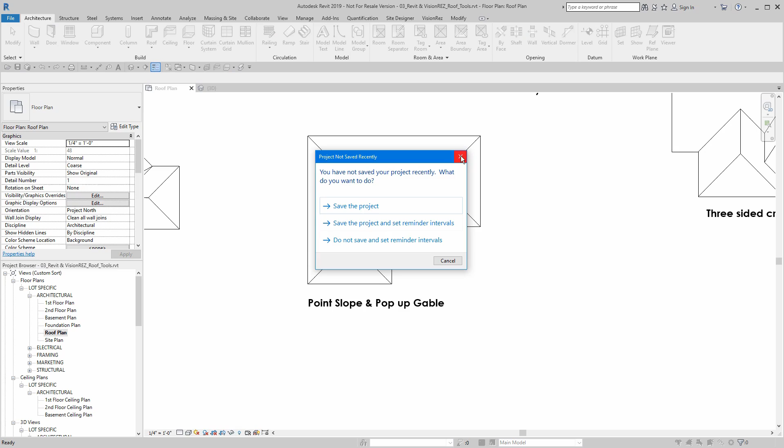Mine popped up with VisionREZ slope arrow. You could have gone to the search and just typed VREZ, and it will pull it up for you. So there's our VisionREZ slope arrow. Place on work plane is where we want to put it. We're just going to put it on top of the roof for now. Select it and delete it.

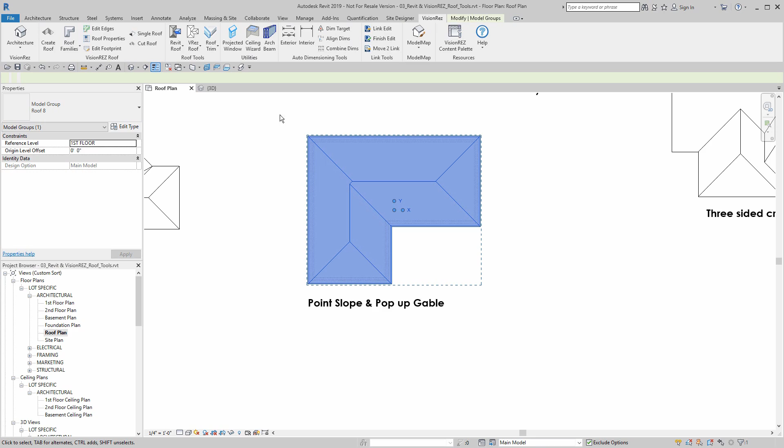Now let's edit this roof to add that point slope. So let's do edit footprint. And to make it a little bit easier to see, we have a button called walls, and it just turns all walls off. So with that gone, let's use the point slope tool.

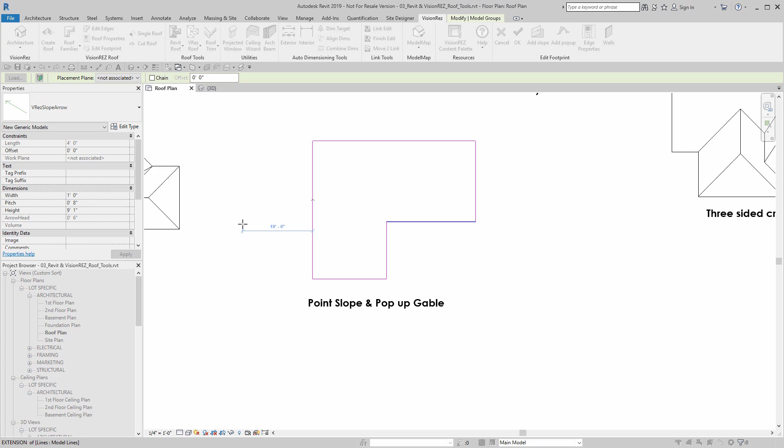Kind of pick on the corner that we want to match, come straight across, and we're going to pick twice. One is the location. The second is where we want to start from. Thirdly is the direction we want to go with that point slope. Just hit escape to get out of the command, and let's say OK.

It's going to pop up with, do you want more time? This is very important because we do not want more time, because it cannot solve, since it has a plus here and a plus here when we go into our edit edges here in a second.

Here's our line, or here's our edit edges. I want to suspend for right now. So let's go through here and set up the settings appropriately.

Let's turn this into a gable, this into a gable, and also this piece right here is going to be a 1'4" overhang. So I'm going to hit apply, and then I'm going to hit solve roof.

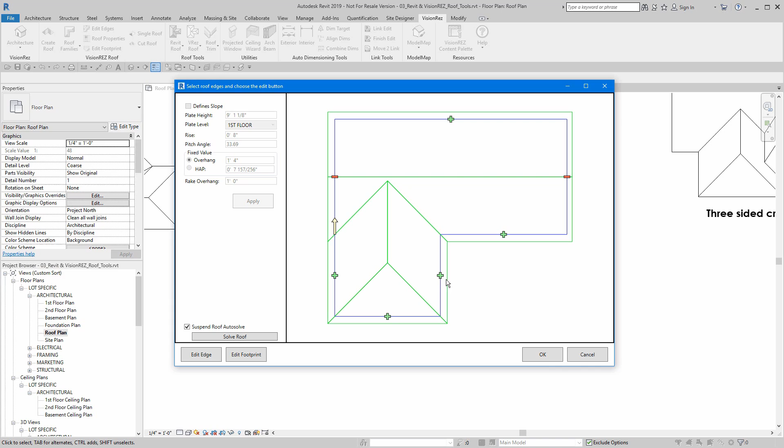So it solved the roof, it broke it right down the middle. We're sloping at the same location from across this area over here. So this is a proper way to put in a point slope. I'm going to say OK from here.

All right, so now that we put the point slope in, we have that looking correctly. Let's go and add the pop-up gable. So I'm going to select it, do edit footprint, and I'm going to turn the walls off to make it a little easier, and I'm going to do add pop-up.

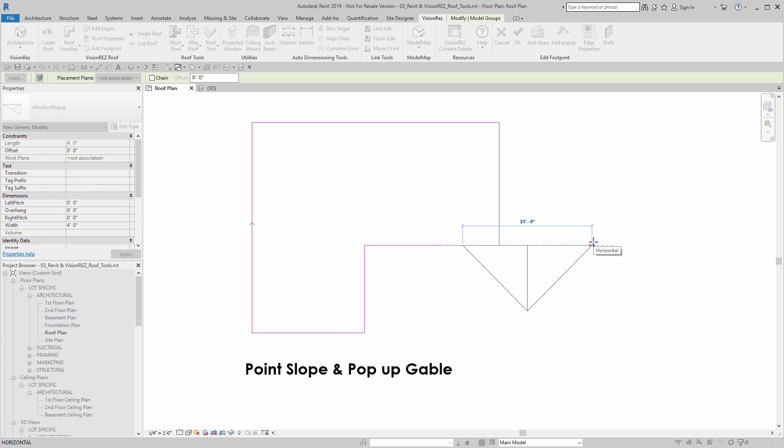And if you go from right to left, it'll put it in there correctly. If you go the opposite direction, it puts it in there differently. And the space bar does not flip it. So just remember, go from right to left.

So let's put one in there that's at least even numbered. And we could dimension to it just to make sure it's centered. Looks like we're close, so let's just pick this and do an equal. There we go, we're right in the center now.

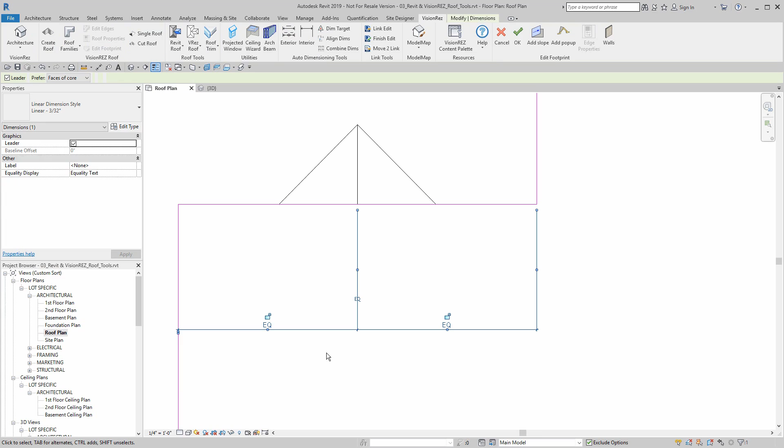We can unconstrain it from the dimensions, and we can say OK from here.